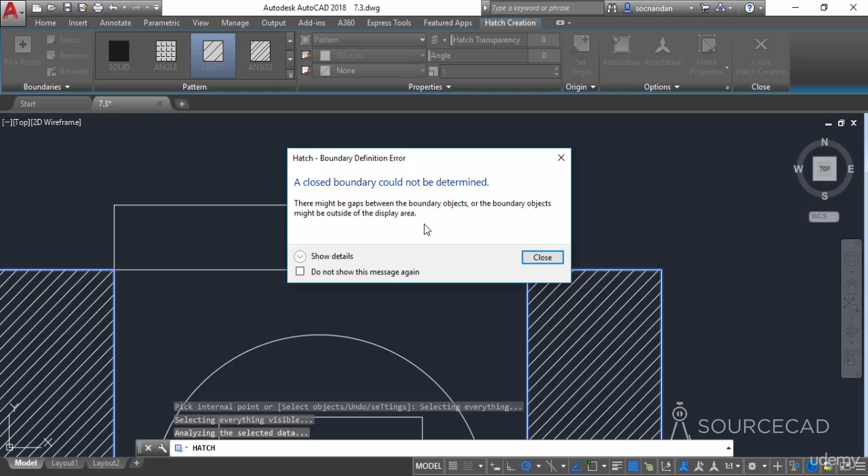But if you try to apply the hatch in this area, there will be a warning message stating that a closed boundary is not determined. But that does not mean you cannot apply any hatch pattern in this area. You can still apply the hatches here using the gap tolerance.

So I'll close this hatch creation and remove both of these hatches, and now I'll once again select this hatch pattern. I'll click in this area, and obviously you'll find this error message. Now we need to change some values in order to apply the hatch here.

Go to this options panel, expand it, and here you'll see this gap tolerance option. You need to increase the gap tolerance, and the gap tolerance value should be approximately larger than the value of the gap here. So whatever the gap is, the gap tolerance should be greater than that. I'll type DI to find out the gap here, and the gap here is 4.70 units. So let's add a value of 5 in gap tolerance.

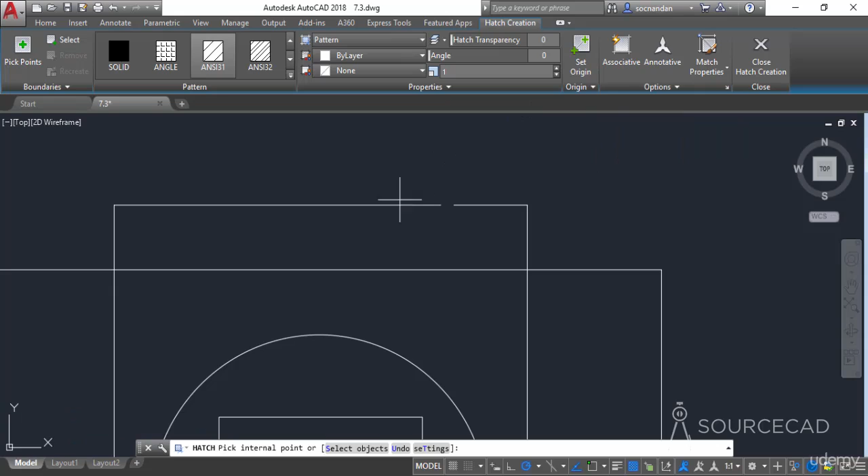So select the hatch pattern, expand this panel, add a gap tolerance of 5, and press enter. Now let's go to this area again and click here, and now we have a message box which is different from the one we saw earlier, with this 'continue hatching this area' option. Select it, and the hatch will be applied here, only because of the gap tolerance. Now click on close hatch creation, and here we have it—the hatch is applied even when there is an open area.

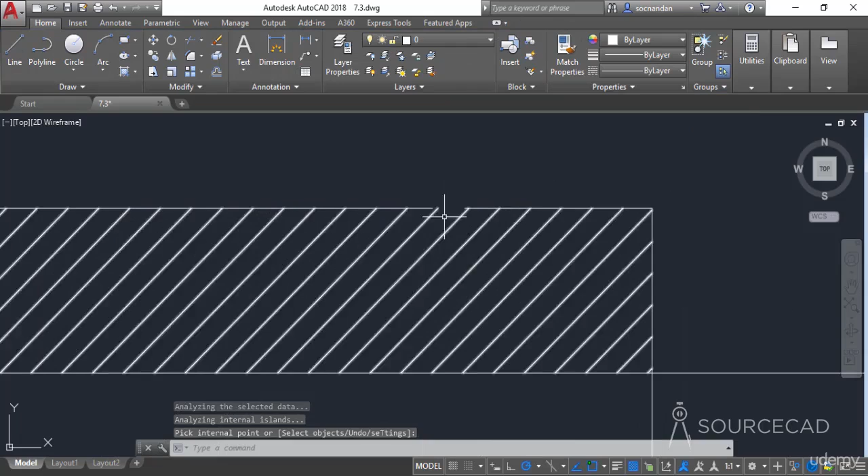So now let's erase it and look at other options. I'll select the hatch pattern, and now I'll select multiple areas to create our hatches. So I'll select these 3 areas, and now I'll close the hatch creation.

Now in this case, when you click on any of these hatches, you'll find that all of them are selected, because I selected all these areas in a single run to make this hatch, so they're treated as a single unit. You can make them separate hatches by creating them one by one — make this hatch, exit the command, make the next hatch pattern, exit the command, and repeat for the last one.

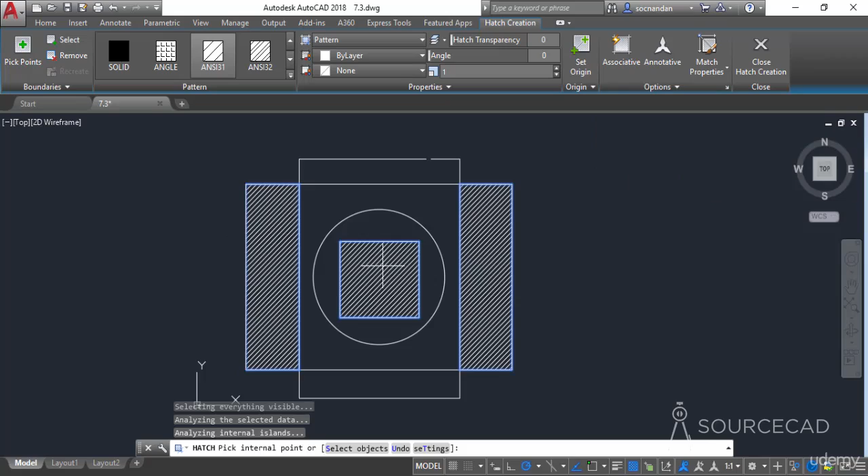Or you can select a different approach. I'll first erase this hatch pattern, and now once again go to the hatch tool, select the first area, the second one, and the third area. Now expand these options, and here we have a 'create separate hatches' option. Click on that, which ensures these hatches will be treated as separate entities. Now click on close hatch creation. Select any of these and they are completely separate from one another.

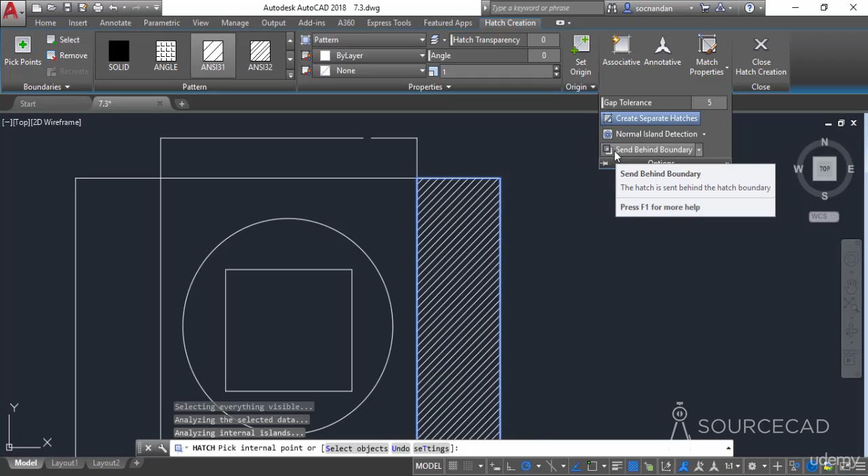There is also a draw order for hatches, so let's erase this complete hatch pattern. Now once again I'll select the hatch and select an area — let's pick this one first. Now we have a boundary and also a hatch, and we don't know whether the hatch is overlapping the boundary or the other way around. To check that, expand the options panel, and here you'll find the option. Currently the hatches are behind the boundary, as shown by the 'send behind boundary' option being selected. Let's keep that option active — the hatches behind the boundary — and close the hatch creation.

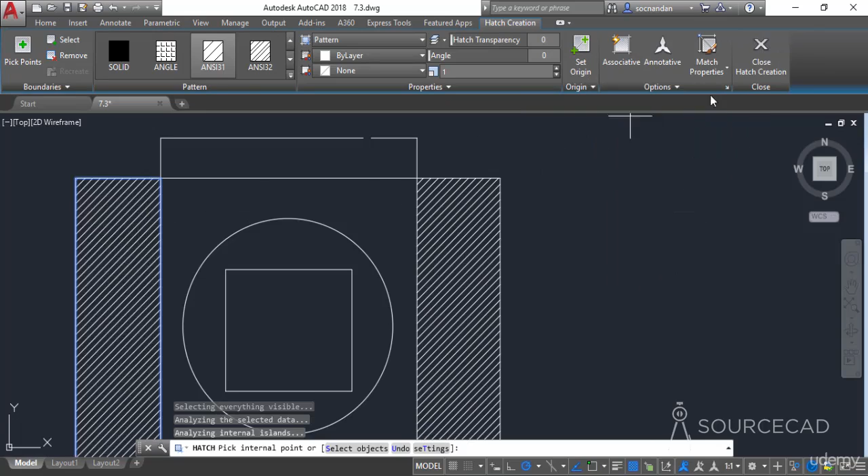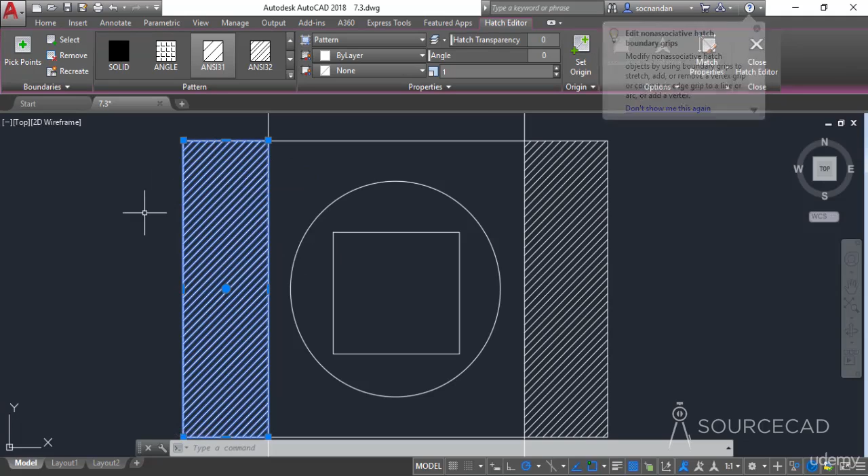Let's go to the hatch again, and this time change the option to 'bring in front of the boundary', apply the hatch here, and close it. So in this case the hatch is above the boundary, and in the other, behind the boundary. Let's see the difference — move to the boundaries here, and you'll be able to select the boundary because the hatch is behind it. Now in this case, when you move to the boundary, the hatch will be selected instead, because it's overlapping the boundary. That's the subtle difference between these two hatch patterns.

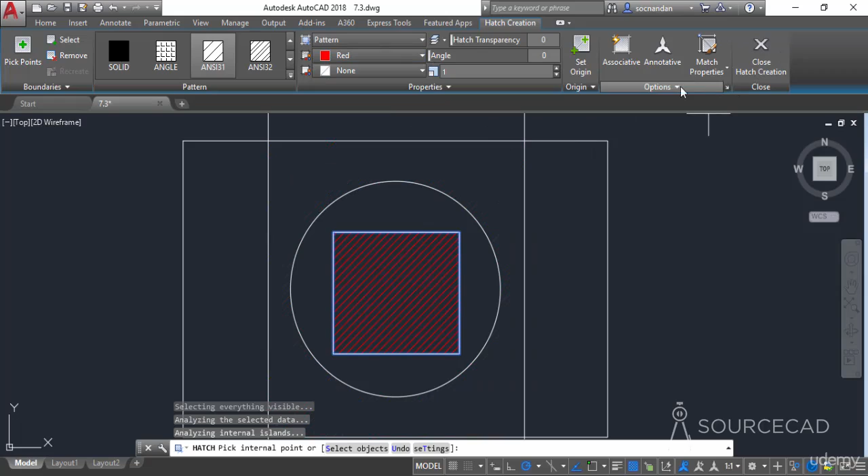You can also change the draw order of hatches. To make it clear, I'll create a new hatch pattern — select this hatch, click on this area to apply it, and change the color of this hatch to red. Now here we have these options. Let's click on this dropdown, and here we have many options like 'send to back' and 'bring to front'. Let's select 'send to back', and now click close hatch creation.

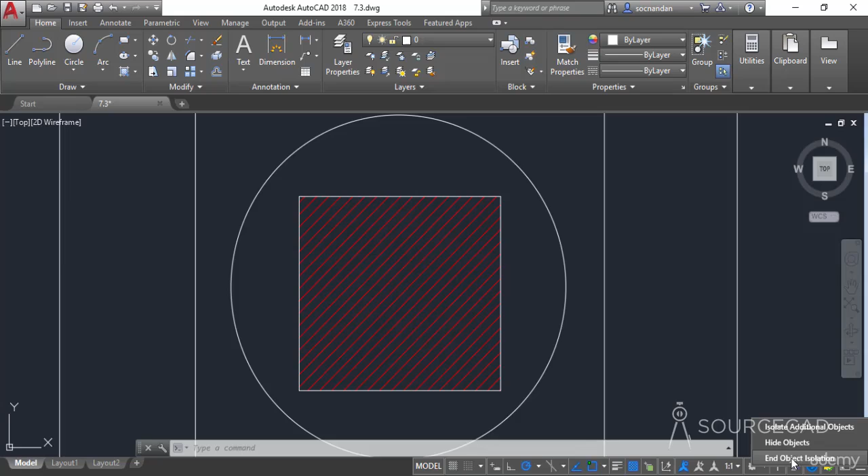Now the current hatch pattern has been sent to back, but it's not making any visible difference. So to see the difference, let's bring in the hidden text. I already created a text here, so I'll bring it into the drawing area using this end object isolation, and now you can clearly see that the hatch is behind this text.

Now what if you want to bring this hatch above the text? For that, you can modify the hatch — select it, go to the options again, and from here choose 'bring to front'. Let's select that and close the hatch, and now you can see this hatch is clearly overlapping the text. So that's the difference between the different draw orders — in the previous case it was behind the text, and now it's above the text. You can select any of these options.

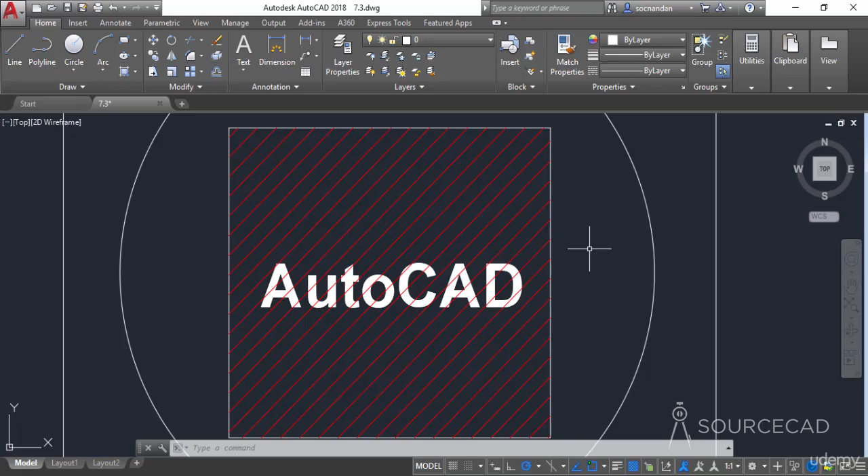So that was all about some of the advanced features of hatch.